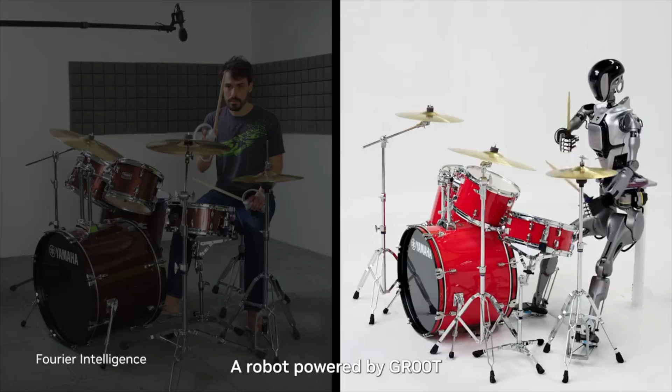What's really cool about their demo is that they show how they can package a cardboard box together, not just pick and place, but actually filling it up. I want to show you that later as well. So welcome, Scott. Hello, Herbert. I thought these were just only going to be weekly affairs, and here it is only Tuesday.

Daily affairs. All right, so let's watch this. Yesterday we saw the NVIDIA conference, where Jensen Huang talked about these humanoid bots they're working on. Then Jim Fan, founder of the NVIDIA GEAR Lab, their embodied AI group, said: 2024 is the year of humanoid. There's no robot hardware more general purpose. We are all in, the humanoid is going to be a big deal. They're supporting these bots. Then Yuke Zhu, co-founder of the GEAR Lab along with Jim Fan, dropped this video. We'll watch this now, and it explains a lot more than what we saw yesterday.

Project GR00T, a general purpose foundation model for humanoid robots. This is their foundation model that will allow all these different vendor partners to use. It will enable robots to follow natural language instructions and learn new skills from human videos and demonstrations. We'll watch that now, it's a 3-minute long video, and then we'll come back and explain each part as we go along.

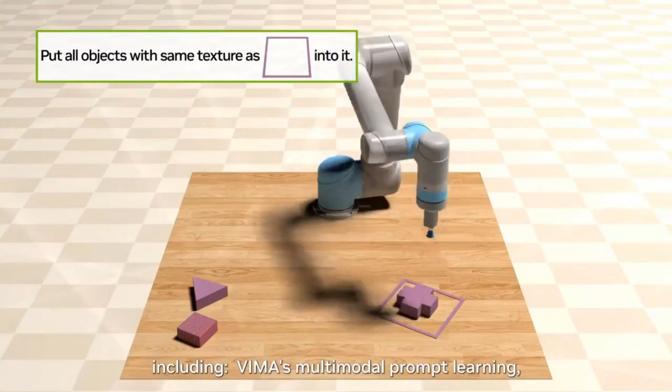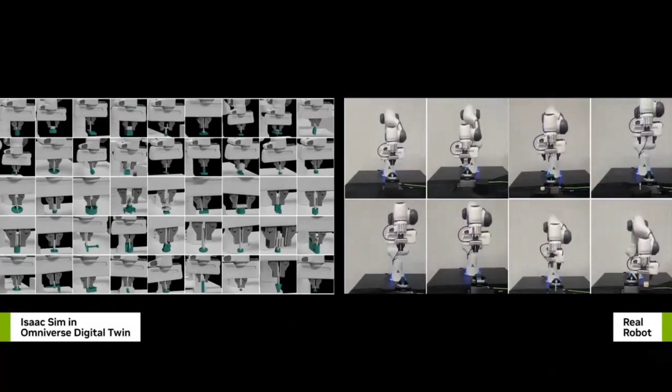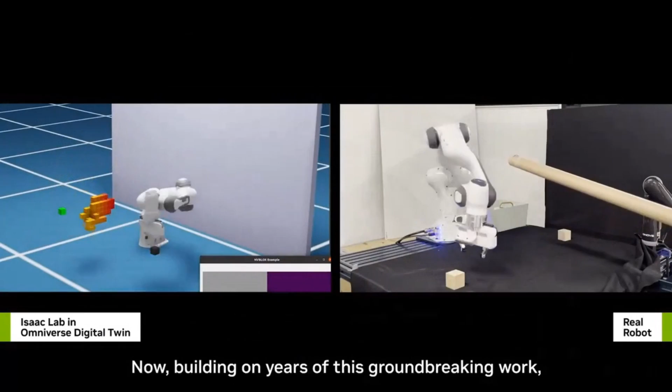Over the past decade, NVIDIA has made massive leaps in robotic learning, in simulation and the real world, including VIMA's multimodal prompt learning, DeXtreme's highly dexterous manipulation, Automate's diverse assembly solutions, Animal Parkour's adaptive mobility, and Isaac Manipulator's novel object pose estimation, grasp identification, and real-time dynamic motion planning. Now, building on years of groundbreaking work, it's time to reimagine the mind of humanoid robots.

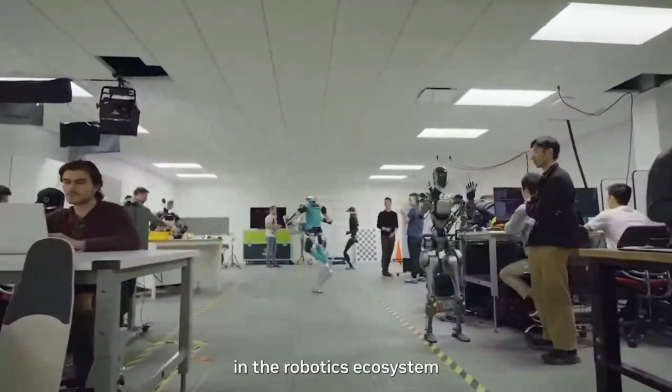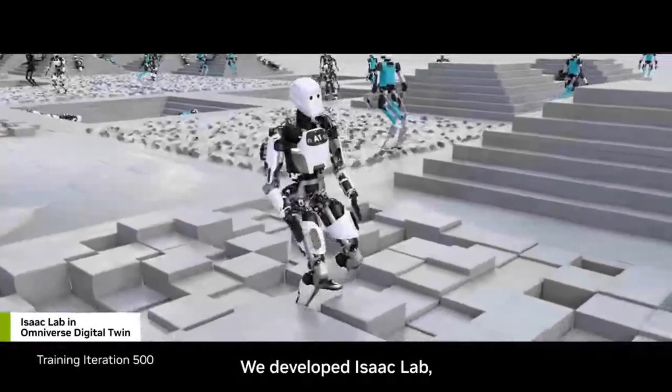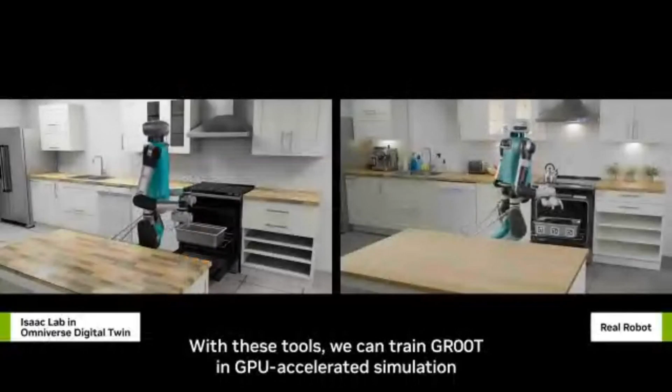Researchers at NVIDIA are working with leading innovators in the robotics ecosystem to create NVIDIA Project GR00T, a general-purpose foundation model for humanoid robot learning. The GR00T model takes multimodal instructions and past interactions as input and produces the next action for the robot to execute. We developed Isaac Lab, a robot learning application to train GR00T on Omniverse Isaac Sim. And we created OSMO, a compute orchestration service that coordinates training and inference workflows across DGX systems for training and OVX systems for simulation. With these tools, we can train GR00T in GPU-accelerated simulation and transfer zero-shot to the real world.

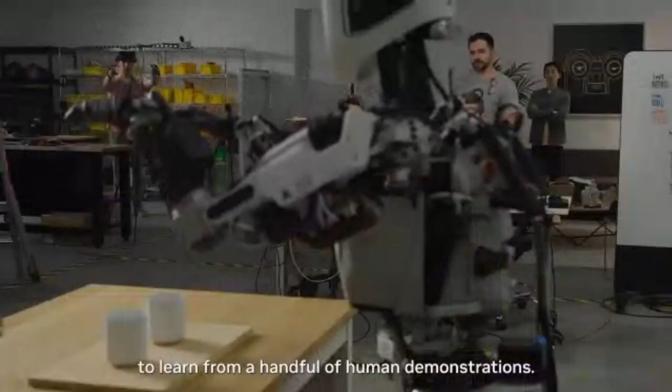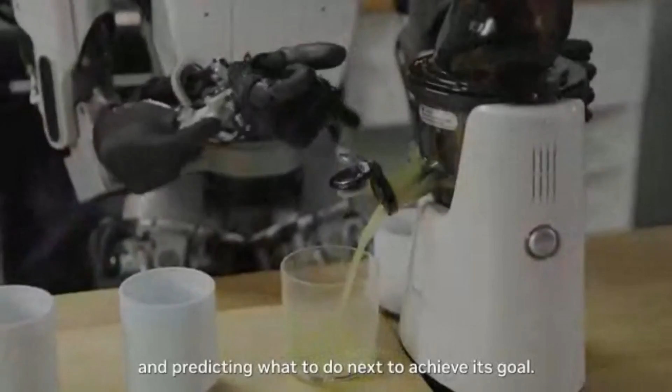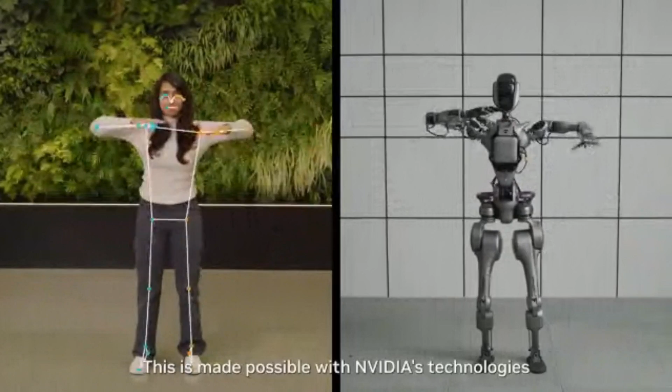The GR00T model will enable a robot to learn from a handful of human demonstrations. The robot could then help with everyday tasks, like cold pressing juice. And it's not just repeating the training data, it's recognizing its environment and predicting what to do next to achieve its goal. A robot powered by Groot can learn generalized skills like coordination and dexterity that can be applied to a variety of helpful tasks, and emulate human movement just by observing us. This is made possible with NVIDIA's technologies that can understand humans from videos, train models in simulation, and ultimately deploy them directly to physical robots.

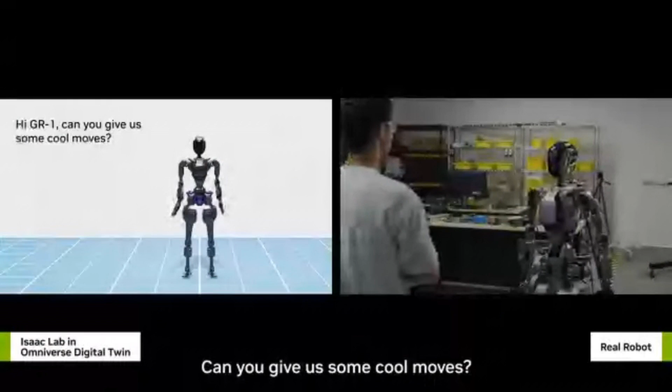Connecting the Groot model to a large language model allows it to generate motions by following natural language instructions. Hi, GR-1, can you give me a high five? Sure thing, let's high five. Can you give us some cool moves? Sure, check this out. With Isaac Lab, Osmo, and Groot, we're providing the building blocks for the future of AI-powered robotics.

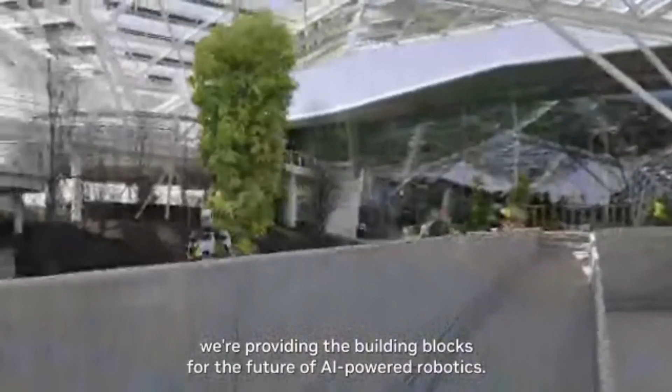So very similar to the video we shared yesterday, but at least this time around they actually explain a little bit more. What did you think, Scott? Yeah, it was nice to see some of the background and narration to fill in some of the things we were saying, and maybe confirm what we had, and correct anything we were a little bit wrong about.

Also, remembering that NVIDIA has had a long history in this arena already, way before the humanoid bots, trying to solve other sets of problems in robotics. That's why they have such a powerful toolkit, because they're building on top of the experience they already have. It doesn't hurt to already have a lot of experience in your pocket, to know what your vendors are going to need and understand exactly what their needs are, building on top of it.

It also seems that everyone really wants to partner with NVIDIA. Usually you see partnership announcements with 2 or 3 partners, but here there's 10, and they were all the big names save one. We know which one that is, because that one doesn't need to partner with anyone - that's Tesla. But all the others need to, and they're coming on in there. I think they're very willing to do it, because I don't think NVIDIA plans on ever building their own humanoid bot. They'll probably be happy to just have the brains of the bot, but let the robot chassis be developed by anyone else who wants to do it.

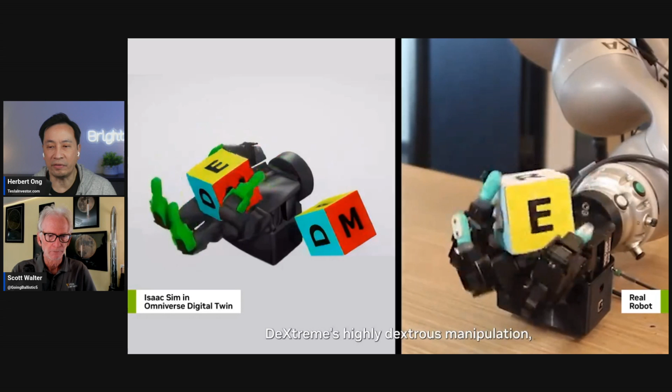OpenAI did something similar, where a Rubik's Cube would end up being solved by a robotic hand. To do that, you needed lots and lots of training data, and it would take forever to do on the real one. So you need a simulated environment to get an idea of exactly how it's going to work. It's a really tricky problem because there's a lot of physics involved—everything about the contact points, where they are, what you have to do to move it around.

Especially when you're doing a Rubik's Cube, this is a lot harder than just manipulating a cube. Getting everything to spin around with a Rubik's Cube is something else. Doing it with one hand—for a human it's hard enough doing it with two hands, try doing it with one and figure it out. That was an amazing thing that OpenAI did.

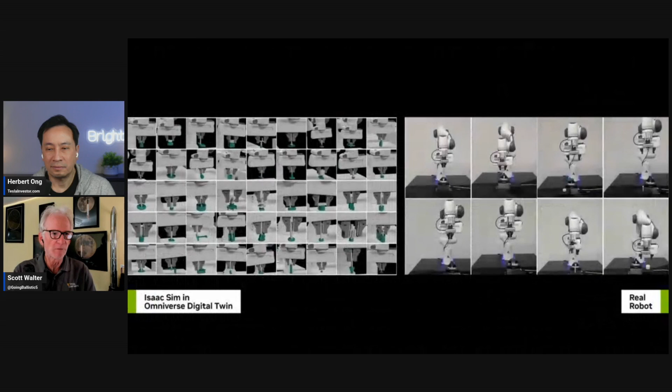We're seeing the same kind of thing here, trying to develop dexterity through simulation. You need a really good digital twin to simulate everything that's going on. Once you get enough training data, you can start to deploy to the real world, and when you bring it there, it might be okay. Then you need a lot of training in the real world to get it right, because your physics may be off a little, or your model isn't quite right, and you need to tune it for that.

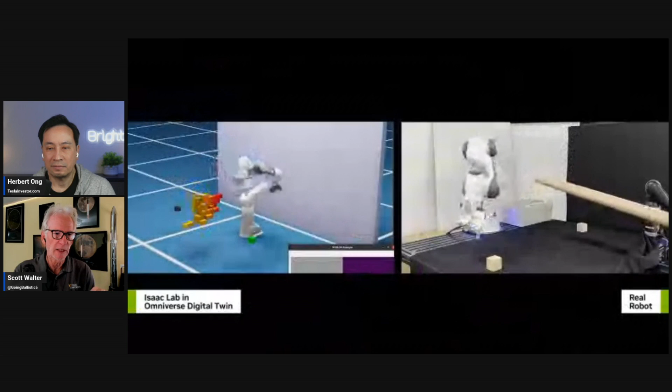But the idea is to get these models better and better so they work right out of the box. You can make all the mistakes, try all the possible combinations, and train them in simulation really quickly. It takes a lot longer to figure that out in the real world, or to do those runs in the real world. That's what they're talking about here, and there's a lot of other interesting things going on too, like dynamic collision avoidance.

So that was just traditional robotics, and now bringing it into the humanoid space, realizing how they can accelerate what they've already been able to do in that other robotic space into the humanoid bots. Training data is going to be key.

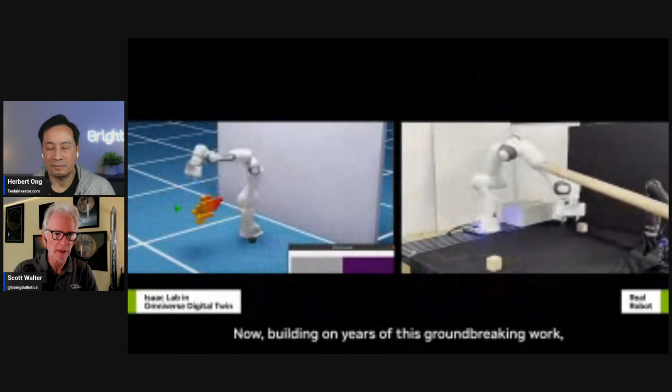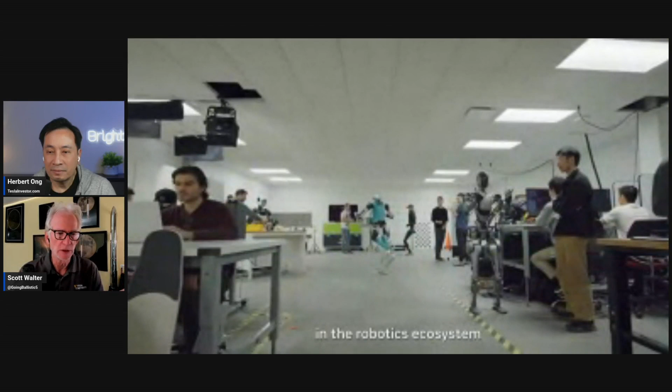We know with FSD, the more the cars drive, the better FSD gets, because it needs more and more examples of what driving is like. Same thing with these different tasks—you need to see these different kinds of robotic tasks to be able to plan what the bot is going to do, doing all the training and testing in your virtual world before you go ahead and deploy.

The better you can do that, the better it's going to behave the first time—they refer to that as one-shot training. So they come up with an example of what they want the bots to do, then simulate it numerous times to understand its environment.

It's not that we're keeping the glasses and everything in exactly the same location each time—that would be easy, the bot could basically close its eyes and pick it up. The idea is that it recognizes certain objects and knows what it has to do. So you can place those things differently and it will figure it out, even though it's never been trained on that specific task exactly the way it is.

That's what they mean by one shot—they've done so much training in simulation that when you do it in the real world, one shot, it can do it, even though the world has been randomized at that point.

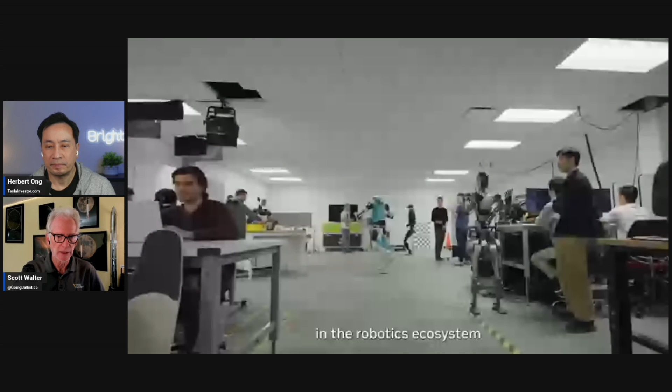It's a kind of task, maybe something like a cleaning task, picking up the glass and wiping it down. You train it and train it in enough different positions and orientations in simulation that when it sees it in the real world, it knows exactly what to do, even if the position of that glass isn't exactly the way it has seen it before.

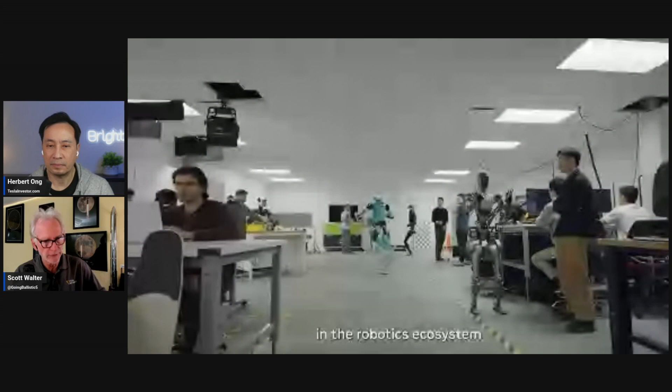It's just like, oh, I know how to interpolate that and figure out what I need to do to be able to do it, and it'll do it the first time. So if you can do that in one shot without having to go and have it knock over the glass a bunch of times and then gather more training data and retrain, the goal is to always get it as close to one shot as possible, because then those things are just going to be ready to go.

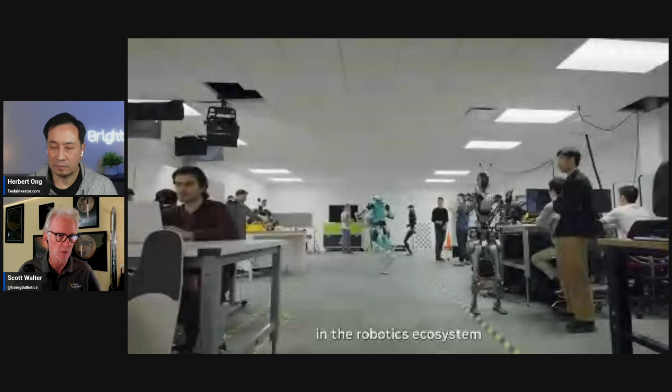At this point, all you have to do is start training all kinds of different conditions and situations so the bots will be able to do almost anything, even though they've never seen it before. Yes, there will be things the bot won't be able to do because no one imagined it doing that particular task, and it hasn't seen anything remotely close to it, so it'll be stumped.

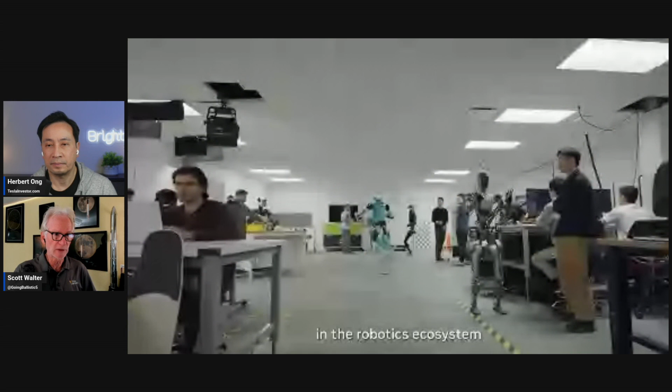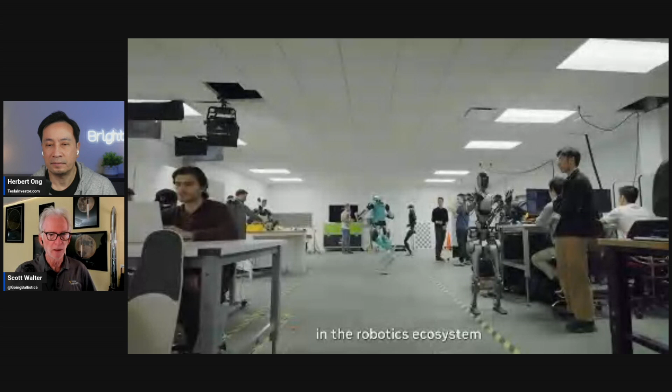Same with humans. We could do a lot of things, but if you suddenly handed me a musical instrument and said start playing, I'd be like, I don't know, it's not on my data set, my training set. It's going to be the same thing with the bots. You're going to be showing it lots of things for factory operations, maybe things in the home. But if you suddenly say, we want you to do carpentry today, and it hasn't seen anything like that, it won't be able to do it. So you're going to need training data for that.

All right, we've got lots to cover here, so let's go through each one of them.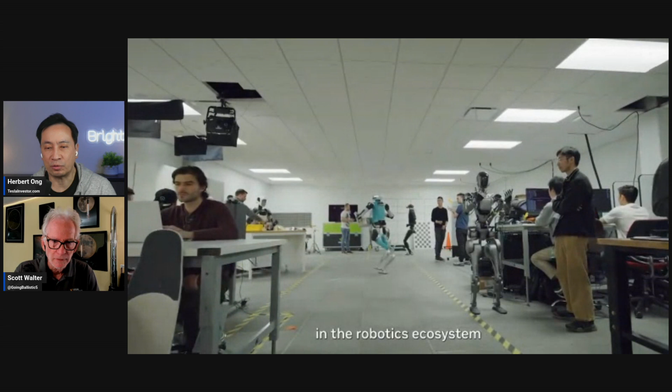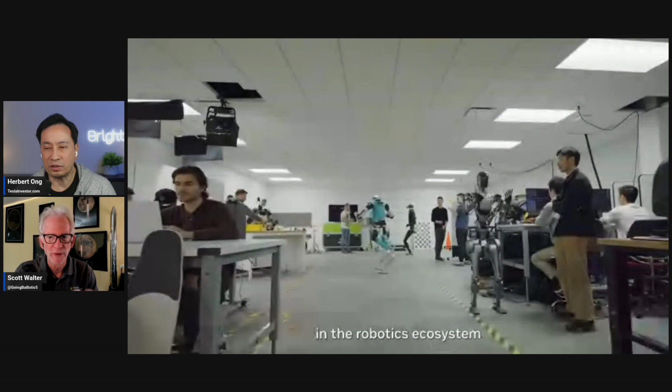It was interesting to see them all in the same shot.

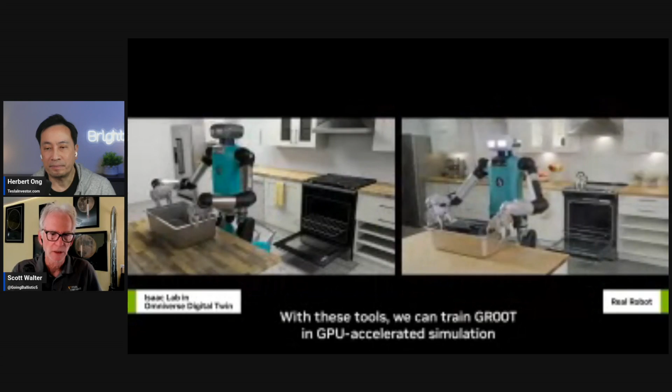This is yet more digital simulation where they're just in a computer, but it looks like from this video that each of the bots - they're all different from each other, but they're training all of them in the same simulated world, and they can still figure out how to learn to walk in that real world. That's very important. Each of them is going to walk differently because, as we can see, Digit has a very different set of legs, which is digitigrade as opposed to plantigrade. Also the servos, the way everything's actuated, is done differently. That all has to be part of that model.

So it's not like you're just doing simple animations and putting a different skin on there to show the Agility bot, the Apptronik bot, Figure, or GR1 going around. No, they are modeled down to the details of how the joints are actuated, the masses, everything. Otherwise, you're not really getting much value out of it - you're not really training it to walk. You need to make sure your data is really rich and correct.

And that way you could also teach it balance in awkward positions and environments, like we saw with steps and uneven surfaces, and also the possibility of getting bumped into - notice one bot bumped into the other and it fell over, and with enough of that, it will learn how to recover. So hopefully you don't have to go out there and start pushing the bots over or hitting them with sticks, but just allow them to learn balance control on their own.

So that was simulated digital twins in the real world. Now we're talking about teleoperation. Let's watch a little bit of this. So again, you've got an operator who, through the glasses, is able to see exactly what the bot is seeing from its own point of view, and then using the hand controllers to move the bot around.

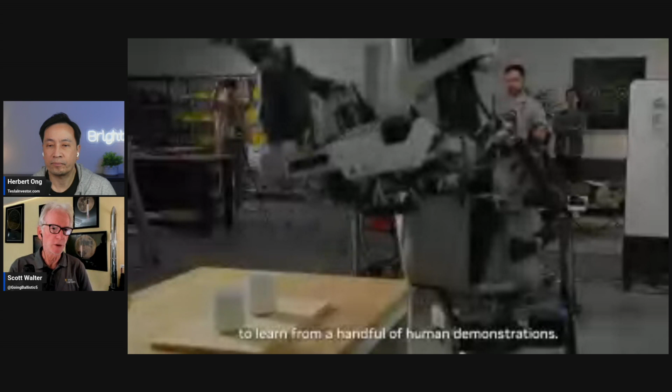The tracking of that data is mathematically used to convert it into whatever the joint values are of the bot. Because the operator can see the bot's actual hands, it's able to see when it's grabbing a glass and tell it to close the fingers, etc. That is then used to start building a training set that you can iterate on, also in simulation. You could take the teleoperated data, put it into a virtual world, and start training on that more and more.

So this guy is teleoperating, and the bot is following exactly what he's doing. This is teleoperating on the left. Some humans are doing it, but then on the right, they let it go and it can do it autonomously. Right after this is done, the very next thing with the drummer is no longer teleoperated.

This is now a video, right? This bot, the video camera is watching this human do these moves, and then the bot copies it, not through teleoperation. They're watching the video, correct? Correct. From that, it's able to infer what it is that the bot has to do. Let's watch a little bit of it.

A robot powered by Groot can learn generalized skills like coordination and dexterity that can be applied to a variety of helpful tasks.

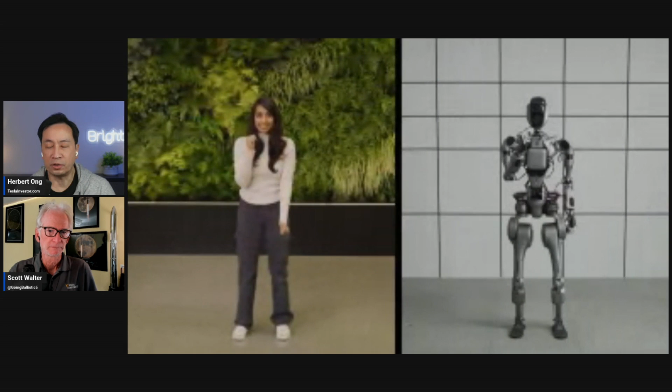And emulate human movement just by observing us. Just by observing, just by video. This is made possible with NVIDIA's technologies that can understand humans from videos, train models in simulation, and ultimately deploy them directly to physical robots, connecting the Groot model to a...

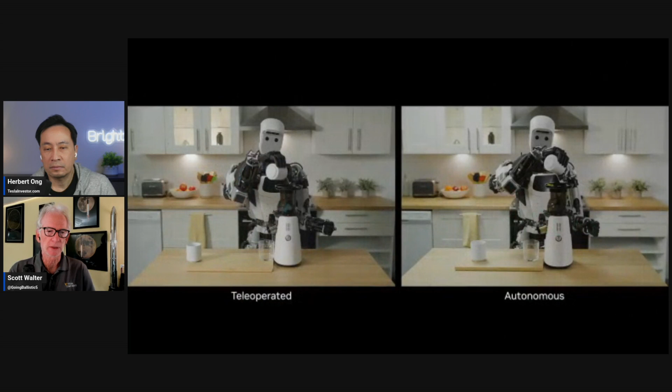Now, what could be different between the two is that in one case, the bot might only care about the fact that you want the drumsticks to hit the drums. That's the task: the drumstick is supposed to hit this cymbal, because we're watching that. We're not really watching what the drummer is doing, we're not doing the exact same kinematic movement of the drummer. You see there's no kinematic overlay on the drummer. It's more or less that the task is having those things hit.

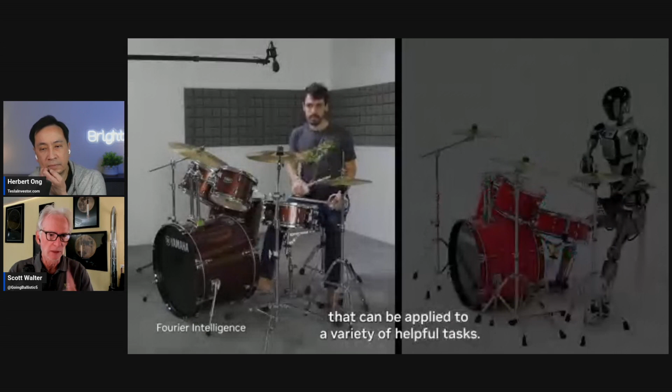Whereas in the next one, the idea is that we want to do exactly what the human is doing, so there's now a kinematic model for the motion of the human, and we emulate that. It's a subtle difference between the two. It almost seems like they were just showing the movements of the drummer, right? No, they were actually showing the movements of the drumsticks, and it was up to making sure the drumsticks do the task they're supposed to do.

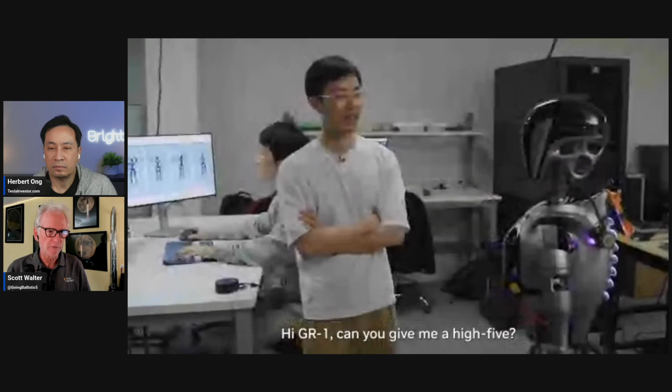So again, it comes down to an operation like the coffee maker example, where you're picking up the cups and putting them in, that's the task. That's what you're teaching them. You're not teaching them the movement of the human. The robot is saying, oh, what I'm supposed to do is pick this thing up from over there and place it in there.

Sometimes the movement of the human can be used as a hint on what to do, but you're not actually trying to do exactly the human motion, you're trying to achieve a particular goal. With the drumsticks, depending on the size of the drummer, if you were looking at exactly the movement of the drummer, the robot may miss the cymbal completely. So the idea is the task is to make sure the drumstick hits this particular drum, not to air-drum or air-guitar, but to actually hit it. That's the subtle difference between emulating the movement of a person and actually accomplishing a particular task.

It's very interesting, now that you explained it, because even the drum example is complicated, right? Because it's not just moving my hands, I'm actually using a tool, and that tool is going to hit something. Drumsticks kind of wiggle; if you hit harder or less hard, and if you hit it hard enough, it's going to fly off your hands. It needed to know how to use a tool to play the drums.

That's amazing. And that's important, because if it comes down to just emulating the human motion, and you've got a bot that isn't exactly like that human, you can't copy that motion one-to-one. My hands are different than their hands.

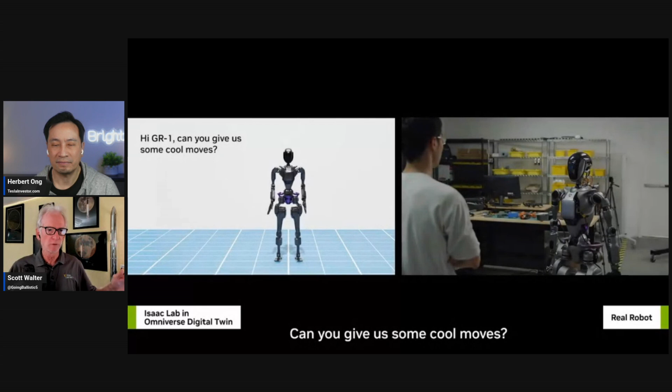Cool moves - well, was it actually taught that doing a dap is a cool move, and it's doing exactly that, and that's what it's called, cool moves? Or has it been taught a bunch of things where they keep telling it, hey, that's a cool move, that's a cool move, show me something?

So it's no different than asking Grok to give me a dad joke. It's not that you've taught it one dad joke - it knows there's this category of dad jokes, and it's just going to pick one out of it.

So it probably picked out a category of cool moves that it just felt, hey, this is kind of for the mood we're doing right now. And it may have done something else.

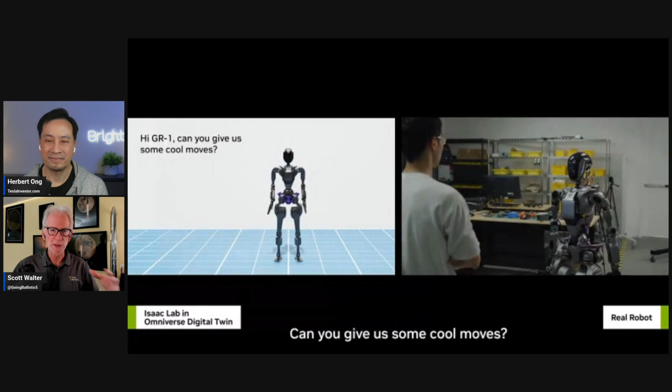So in some cases you can be specific, some cases you can be very vague, and the large language model will make that choice for you, because it's building this really rich - if you want to think of it, a token library, but more or less an action library of all kinds of actions. The language model is picking which action you want to do.

So which joke do you want to tell right now - you read the mood of what's going on, this is the one I'm going to do, I'm going to pull it out of my library. And now it's just motion tasks going in. If it learns enough of these motion tasks, it'll be able to figure out what it is that you need to do at that particular time.

Scott, I'm very concerned that if you're near one of these bots, the bot's going to do something very dangerous, because you're going to say something with all the hand waving that's very logical to you. And then the bot goes, okay, you want me to, I don't know, slap the baby or something - whatever these terms mean - and then it's like, okay, you want me to do that?

Oh my God, okay, this is so cool. Sure, check this out.

With Isaac Lab, Osmo, and Groot, we're providing the building blocks for the future of AI-powered robotics.

With the Easter egg of the last robot being four-wheeled. Right, the last robot's a four-wheeled truck. But that's obviously what Tesla says, right? Elon has been saying that we have 5.5 million robots already today. There's no other robot this many, because every car just happens to have four wheels. But it can actually recognize, it can read signs, it knows what it needs to do based on the environment. It's figuring things out.

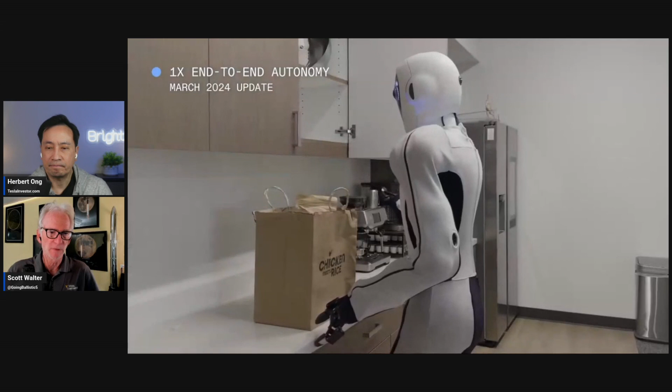So why don't you speak over it and tell us what we're seeing. Notice that everyone's using the same format of saying, hey, this is end-to-end autonomy, and this is our March update. So we're going to be seeing more of them using the same approach. He talked about contact-rich manipulation, where there's obviously a lot of manipulation needing to capture many different things, understanding how different doors and drawers are going to work.

And so it's familiar with this kitchen. Now you notice it's its own kitchen, not the same kitchen that Digit and Apollo were using yesterday. Another task of some flexible items that we've seen here.

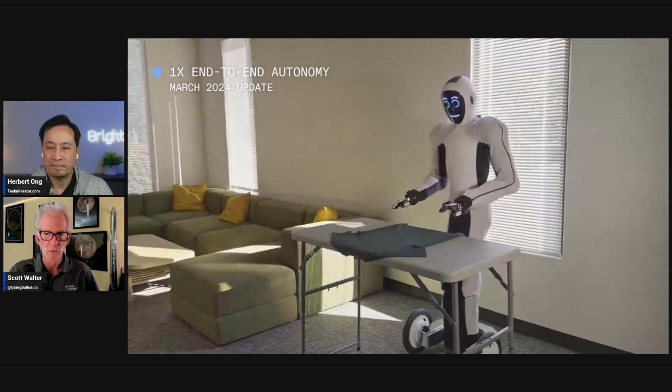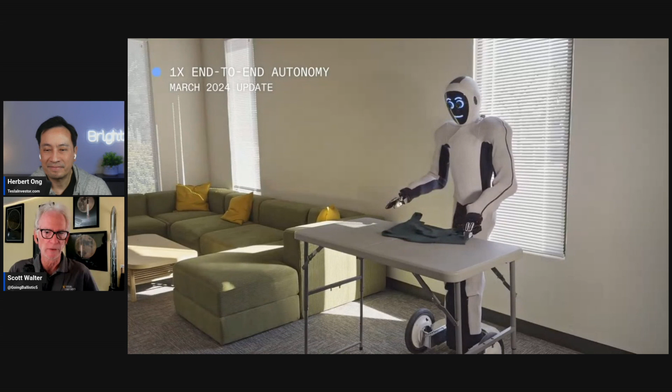This is Eve, which is their first generation, which is wheeled and has very simple hands. Yet even with these very simple hands, it folds a t-shirt about as well as I do. I mean, I'm tolerant of that - they don't have to be that perfect. I just want to make sure they kind of fit in the drawer or in the luggage if I have to go somewhere. So that's adequate for the most part.

Then you'll see that there's manipulation here - I'm not sure, it looks like there's a gesture. From that gesture, it realizes, oh, you want me to hand this to you. I'm not even sure if anything was spoken or if that was needed.

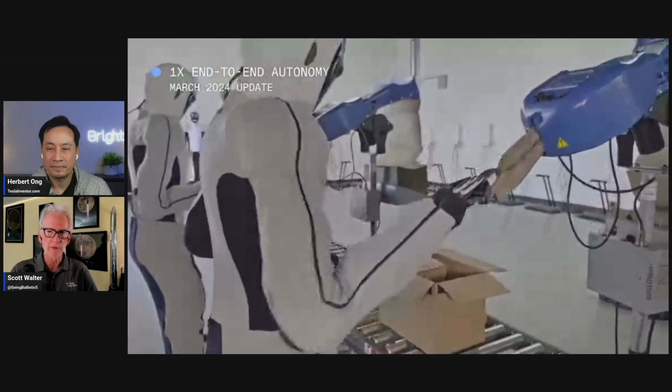Now, we all know this when we get our Amazon packages, that usually not only is there something inside the box, but there's also a little bit of packing material. So it's learning how to close the box, which we all know can be a challenge, especially around Christmas time. And then we have it coming in here and putting some of the packaging material in there. So if you ever wondered how that was done, that's how it's done.

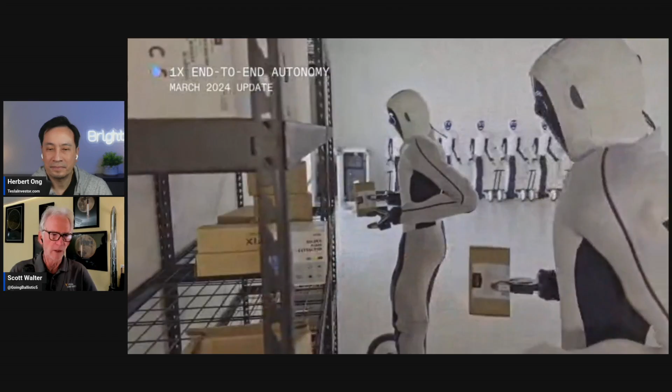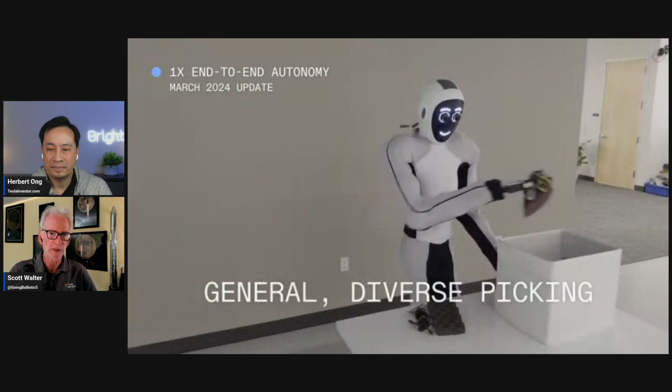So you have these dispensers that are out there on the line, and of course this is something that is done all around the world in all these different logistics centers, where boxes have to be put together and packed up with a little bit of packing material. So you are seeing the first signs of what will probably be some of the first useful work that Eve may end up doing in a logistics center somewhere in Norway or elsewhere in Europe or anywhere else in the world. And again, showing the different strategies to pick up different objects because it's being trained on different objects.

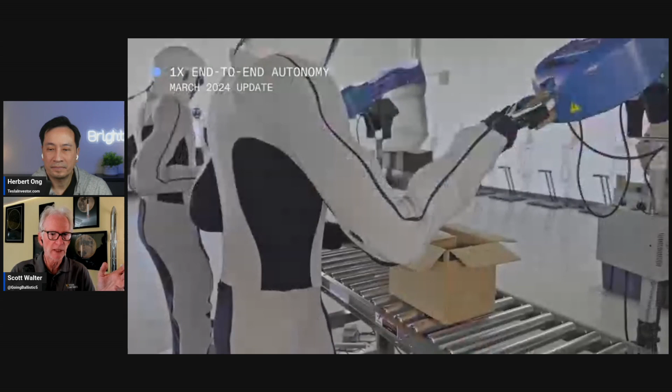Look at what it has to do to pick up the sponge - it uses something that's a little bit different. I wasn't expecting that, but that's one way to do it. Again, very simple pincer grippers are able to do a variety of tasks, even though they are not a 5-digit hand.

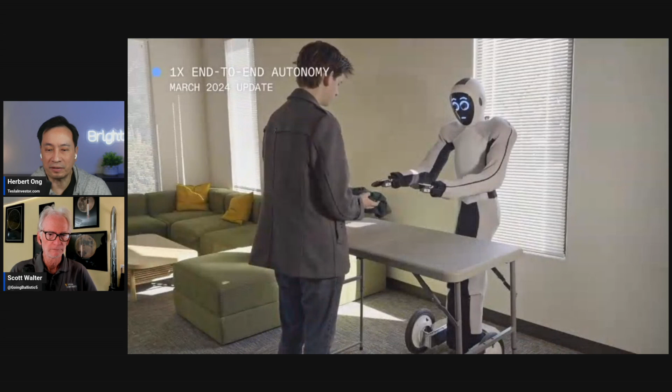This part here is the part that I was very, very excited about - oops, I just had it all set up and ready to go. The part where he's manipulating the box, but you see how he can actually control the flaps of the box.

We've seen, of course, many bots doing pick and place - grab a box, move it, grab a box, move it. But this is like, look, they're saying this is autonomy, right? There's no teleoperating - this is now autonomous. So end-to-end autonomy, one world neural net that I talked about. There's nothing in the middle. It's photons in, actions out.

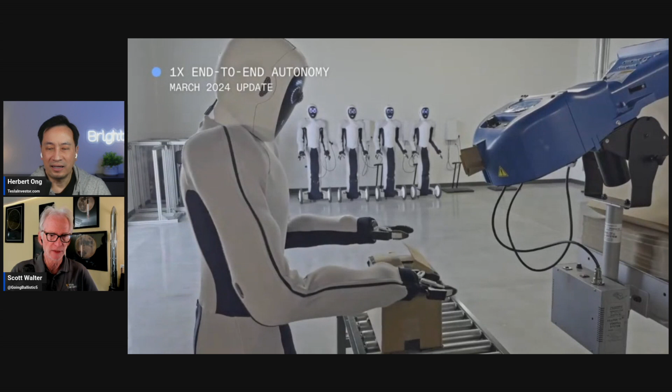So for the bot to not only recognize it as a box, but also to now recognize that there are flaps, and it needs to position the flaps like this - crazy, this is the part that blew me away. Especially if they're doing a lot of this one-shot, it's just amazing.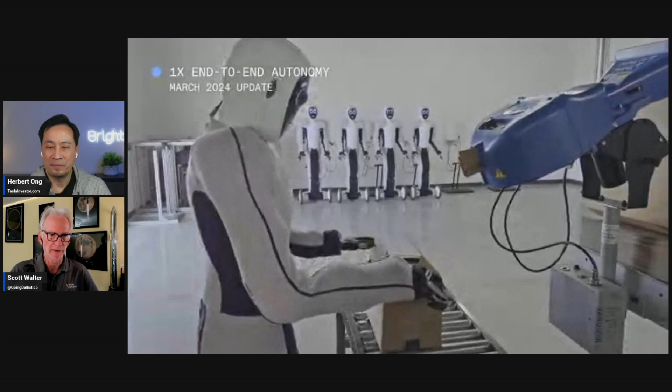I've had to do simulations like that all the time in our software with industrial bots and stuff like that, and it's a tricky animation to get together. Now to actually see something in the real world go ahead and do that, I find that absolutely remarkable without any training except demonstrations.

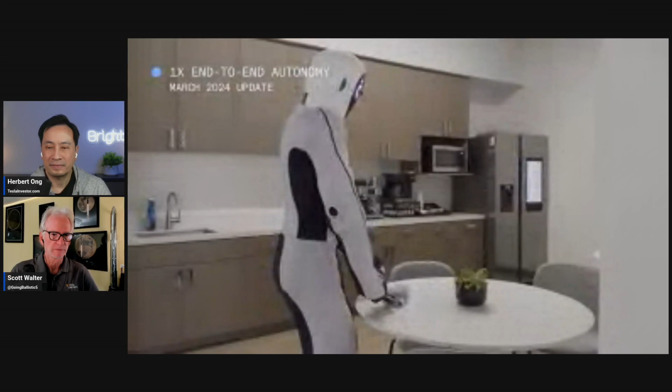Wow, so that one was interesting, but of course it's not as impressive as the others because it didn't have the hands and the feet yet, but they're creating Neo. Neo will be the full humanoid. We saw what it looks like. But then forget the mechanics.

The thing is, we're seeing everyone is able to do this end to end and they're able to get results really quickly. I'm not sure whether to be excited or scared, because what that means is that everyone's being able to converge to it. There's a solution out there. They're all just getting better and better. It's a matter of more and more training data, and the mechanics will come.

Remember, Brett said back in the fall, oh my goodness, I thought the AI was going to be the one that takes forever and that the hardware would be ready before. Now it looks like it's the other way around. I agreed with him at that point that the hardware will be ready before the AI. I wasn't sure if I could agree with him on this flipped around, because I wasn't seeing what he was seeing. I'm now seeing what he's been seeing and I understand.

It's coming really quick, it's coming quick. Which I think is why they're moving probably to their Neo model, because they begin to realize, wow, this is just going so fast. We may as well go get the thing to start walking and let's put real hands on it and everything. We've got a design, let's go ahead and start working on it, because the hardware now needs to catch up.

They've already proven many times, as you saw NVIDIA doing it, simulation can train to autonomy, teleoperation can train to autonomy, and then just videos can train to autonomy, just watching it, and then it can do all sorts of activities. So it then becomes like, how fast can you train something to do useful work? And then the catch up now is how fast can you make these bots?

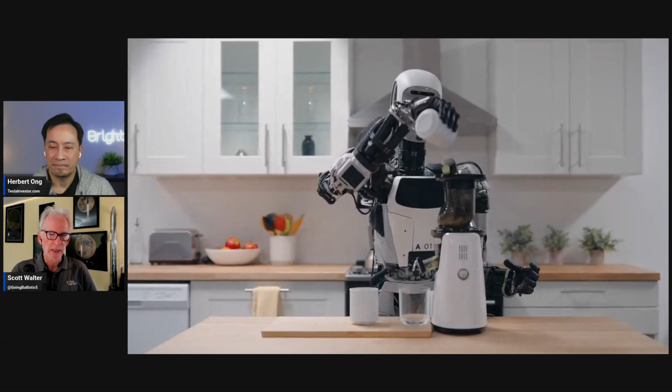Things are definitely moving quick. I think the one thing you can see, as far as all the different ways of training, from demonstration to teleoperation, to the point that, think about the ideal training scenario: it's that we read a book about how to do something, so theoretically we understand how to do it. Usually that means we have to go out and practice what's there. But imagine you can just read a book about it, and the next day you can go out there and actually do it.

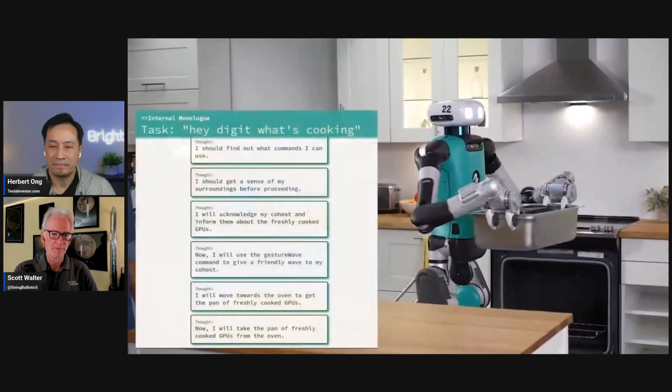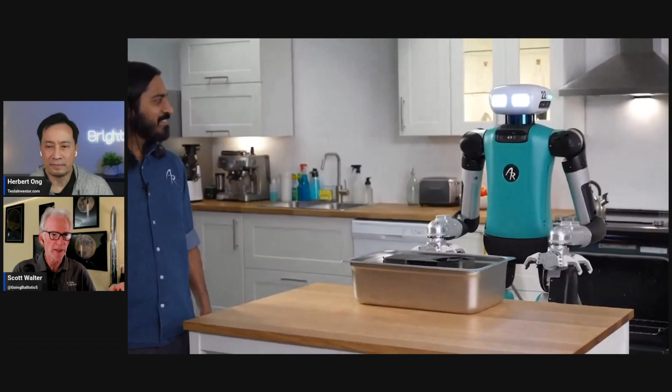So, I read a book on how to play the violin and suddenly tomorrow I'm a concert master. Yeah, it doesn't quite work that way, does it? But it seems that they're getting closer to that. And that's almost what this one shot is like, is that they sit down, they do it in the simulation, and think about it. It's almost like you learn about something during the day, but you're not sure about it, and then you sleep on it. And while you're dreaming, your body is somehow figuring out how to accomplish that task. And the next day you get up and like, wow, I can do it all of a sudden. That's what's going on in the simulations. It's basically putting it into this dream state, checking everything out, and then it finally understands, and then it wakes up like, oh yeah, I got this, as if it had done it 1,000 times before, because it had done it 1,000 times before in its head.

You know, it's funny, right? So of course, as these demos drop, everybody continues to complain saying, hey, this is all faked, it's not true. And of course, when Figure dropped theirs, first reaction by everybody was, this is all scam, it's fraud. But when you see NVIDIA doing it, how many people here are saying that's a scam, that's a fraud? Is NVIDIA part of the whole scam as well? Are they all faking this out? I don't think so. Especially when you have all these diverse groups of very intelligent machine learning software developers all over the place, right? We've reported grad students from Stanford, we've reported all these papers that you read, Google, DeepMind, Microsoft, everybody's showing what they can do.

It really is like AI, it's scaring people. Well, now humanoid bots, this isn't fake, guys, this is real. Yes, a lot of it's real. And the thing is, a lot of things that you're seeing are being shown because of the practicality of what has to be done to get the data out. And someone might say, wait a minute, that doesn't look quite right, what's going on here? It's the production quality that sometimes you have to put them out. They are actually doing these things.